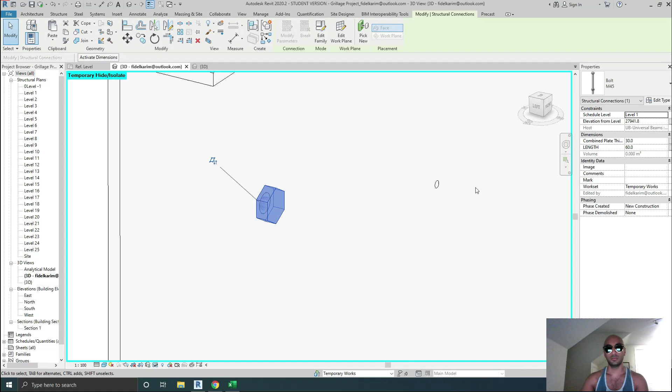Basically, in this video we're going to be making a nut and bolt system.

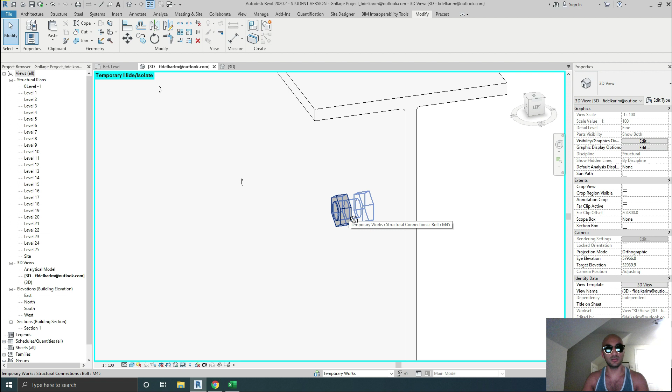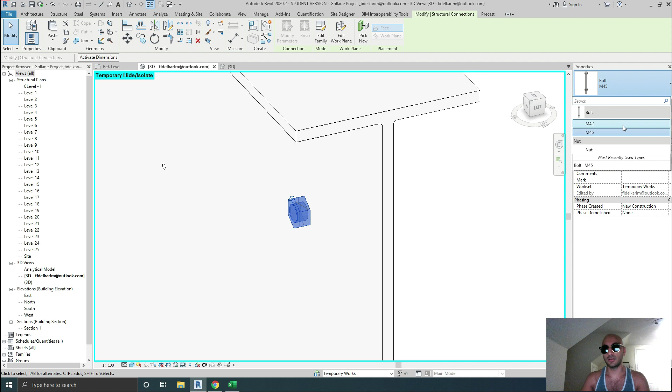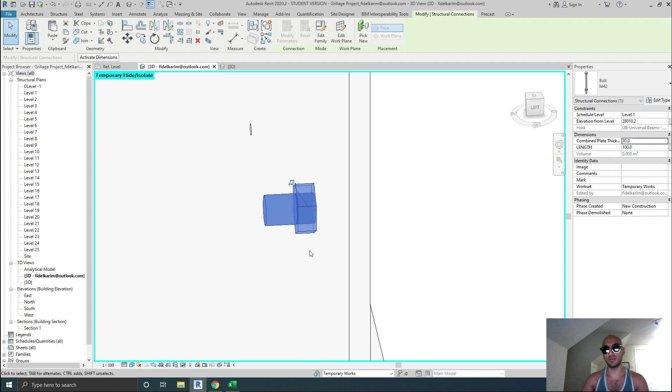So select this bolt, and I can select an M42 size, and it changes to adapt. I can also change the length of this, let's make it 100, that's the full length. Then the plate, I've called this combined plate thickness, because this bolt would be bolting on a plate on this side and a plate on this side. So the thickness would be this thickness plus the plate on this side, and all other plates wherever. Let's say I change it to 40, and we've got a 10mm plate there. You can do that to adapt and it will fit in perfectly snug.

What else can we do with this? We can manually change the diameter here to something else from this list. I've just pre-built in some default, the standard sizes for these particular sizes. These are British sizes, British metric sizes.

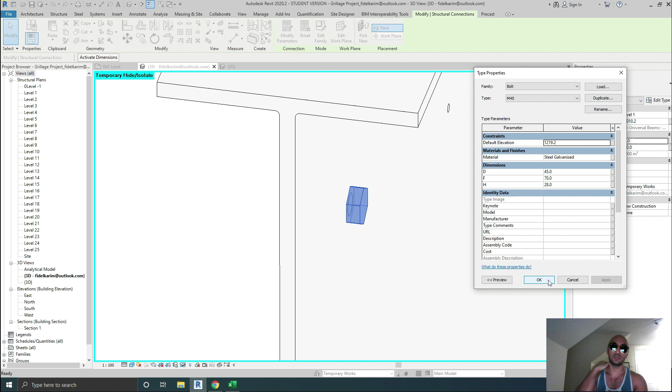By the way, Revit doesn't come preloaded with bolts, so it's very important to know this if you're going to make your own connections. In part 2, we're going to add washers to this, which will be in between the bolt and the face, for those that don't know. And we're also going to make this viewable in fine and coarse modes. Sorry, viewable in fine mode and coarse modes. That'll be in part 2, don't worry about that for now.

So without further ado, let's get started. File, new. Not project, file, new, family. It's got to be metric, generic, face-based. Very important. You can also choose metric generic, but face-based is the best.

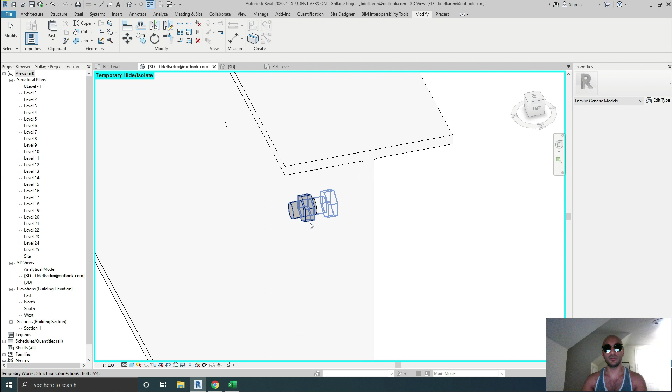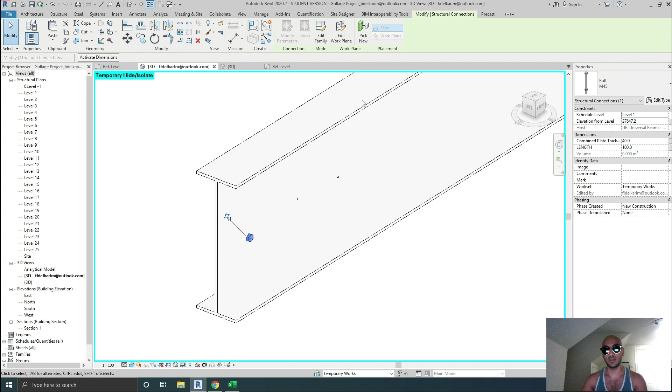Now, the reason for that, this is what you get when you open that. The reason it's face-based is because now that this is on this face, I can move it anywhere along that face, but I can't move it off the geometry. Well, I can move it off, but it's kind of stuck to the geometry of that shape. So although it's moved off, it's still perfectly in line, because it's on that work plane. And if I move this up 500, that moves with it, and that's very important. Always remember that.

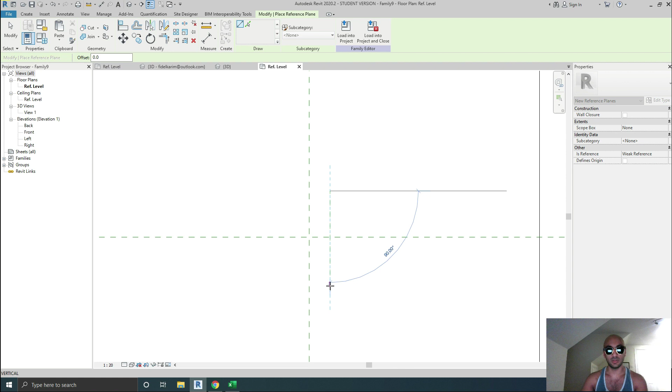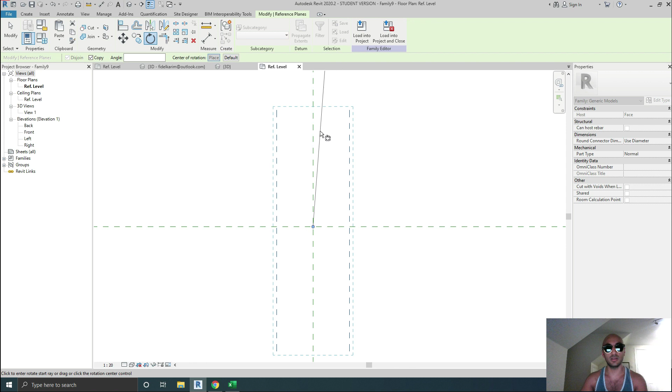Now let's get started on this. Select the reference plane, say CS for create similar. I'm going to create one here. I would like to have them symmetrical, but too bad. Anyway, select it and say DM for mirror. I'm going to select these two, say RO for rotate, copy, say place, I want to move it about this place, there and there. Now select this and say CS.

Create that there, and move it to that intersection. I'll adjust it a little. I should have just copied one. Now select these by holding the control button and selecting them, and say DM for mirror, and there you go. Now you can see a nice little hexagon here.

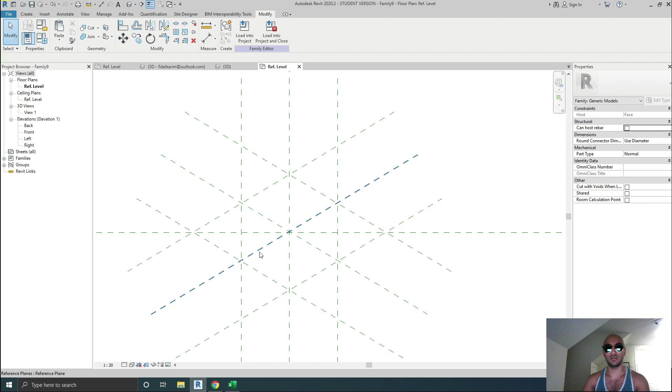First thing I want to do is select these and say not a reference. The reason for that is that I don't want to be able to align to these because they're not really important lines when they're loaded into the model. All will be apparent later, you'll understand later when I load it in. I want to be able to align to this face, that face, or most importantly the center point. I don't want to be able to align to these, they're not important.

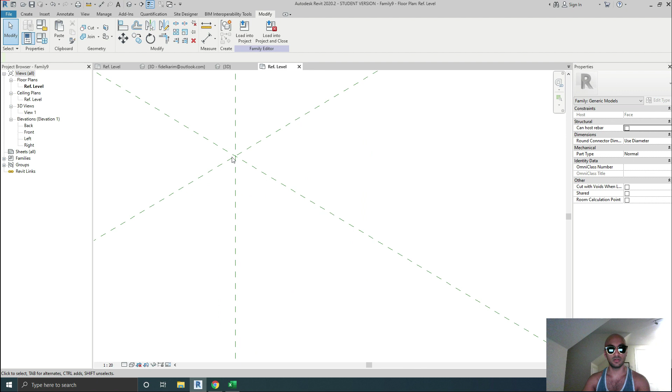Oh, they're not actually. Select them both, say MV. Now they're at the center, it's very important to have them there. Yeah, and these are all good.

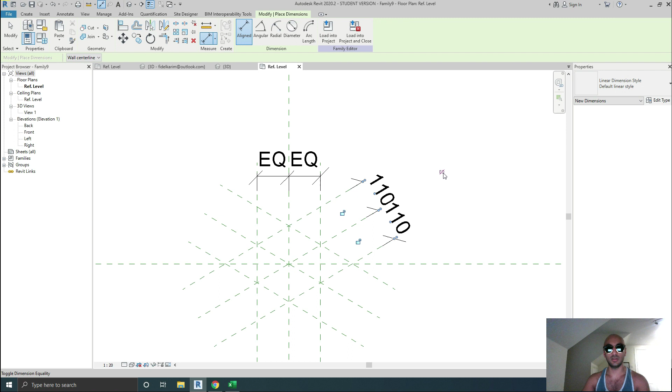Anyway, now let's dimension these. Let me say DI for dimension. This, click, say equal, yeah? This, equal. Oh, before you go on, you should do this before actually - select this one, hold control, select that one, and say pin, so that they don't move. So if I move this, that does not move at all. Yeah, it would have done that anyway, but it's good to lock it in place just in case.

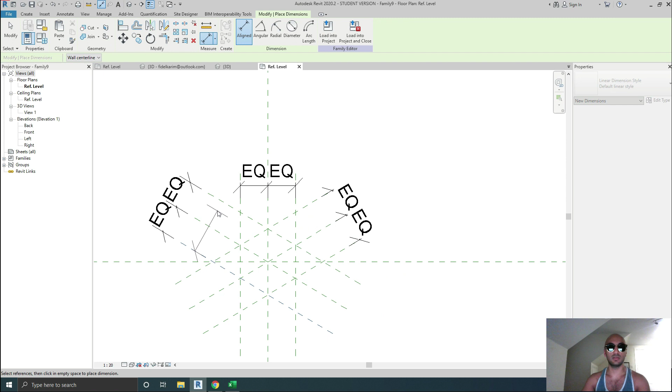Good practice, always remember, good practice is crucial. The moment you do something silly, you're gonna have to find out what you did wrong. That's why we have good practice, we don't want to do silly things.

We want to just do our thing and make sure it's all good. So I'm going to select all of these, holding control, and say new label. I'm going to call this one F, representing the distance across the flats on the bolt head. Yeah, and I want it to be a type parameter.

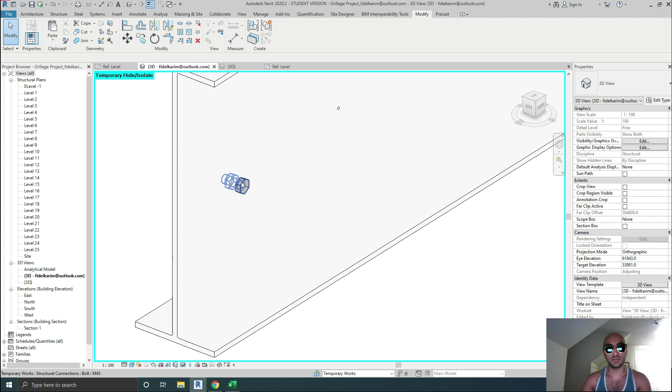So we haven't actually modeled anything yet, but what we have done is we've set up the reference planes for each of these sides. Now in 3D mode,

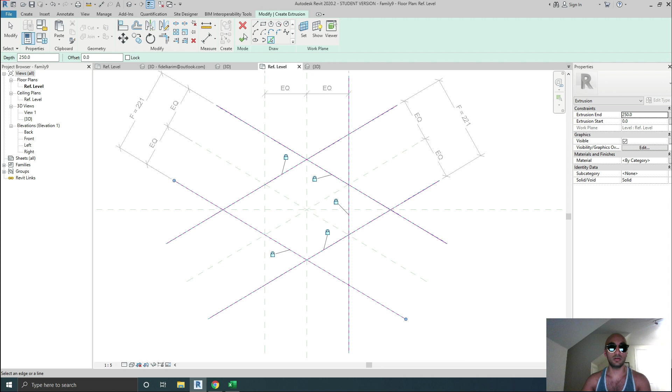I'll keep that. We'll go back to reference plane, reference level, and we will say create extrusion. Select lines, pick lines there, pick this and lock, pick this and lock, pick, lock, pick, lock, pick, lock. Now let's say you forget to lock, or let's say you draw a line manually and you need to lock it to that. You can say AL for align, click this, click that, then lock.

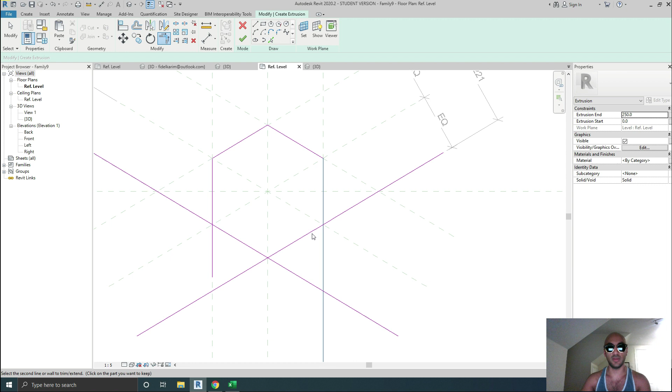Locking is the crucial part. If I align it and then I change something with these dimensions, this will stay in place. Yeah, so always remember to lock. Say TR for trim, there, that, and boom, I think we're done. Yes, we are. Now if I move this up, you'll see they all move together. That is all we want to do. Crucial thing, always put reference planes down and align lines and objects to them.

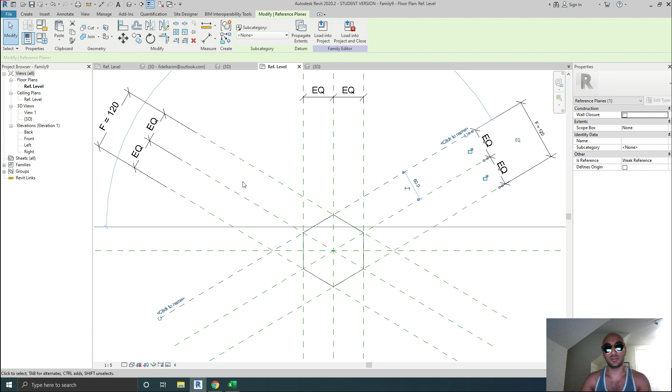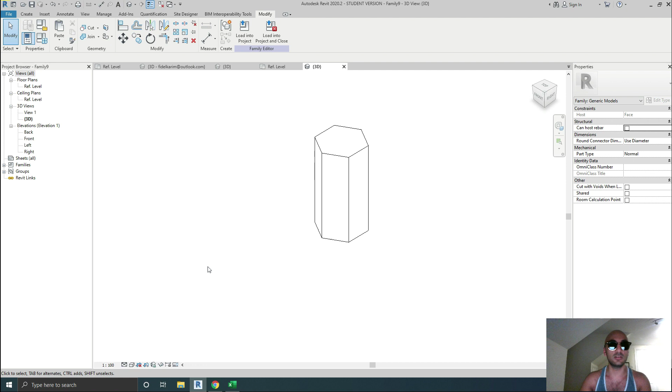Never ever dimension to the face of an object. So never put a constraint or dimension to this extrusion face or that extrusion face. Never ever ever, because they will break. The moment you break one, your whole model's broken, and you need to redimension things and put reference planes in to make it work. We like to make things smart so that we can reuse them. Yeah, we don't create things that break.

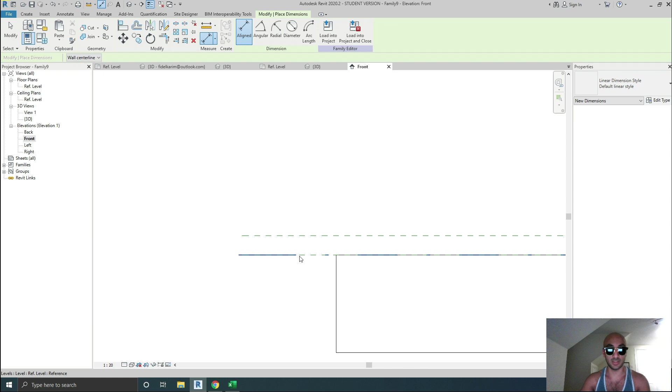Yeah, leave it out. So select a reference plane, say CS for create similar. We're in front view, by the way. Any elevation will do for this. Select, I'll just click and say DI for dimension, and come here to the side, not here, never to the extrusion shape, face, handle, whatever. I think it shouldn't be an issue for this face because it's the default face, but always good practice, reference plane or reference level to reference level plane.

Select that, do that, select it, say new, say call this one H. For the head height, say OK. Now come here, AL for align, click that, lock. And now you'll see the height, you can change it. Sick. Yeah, and that's the head done.

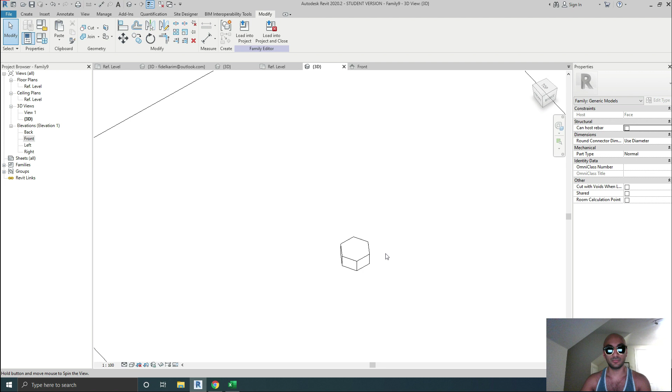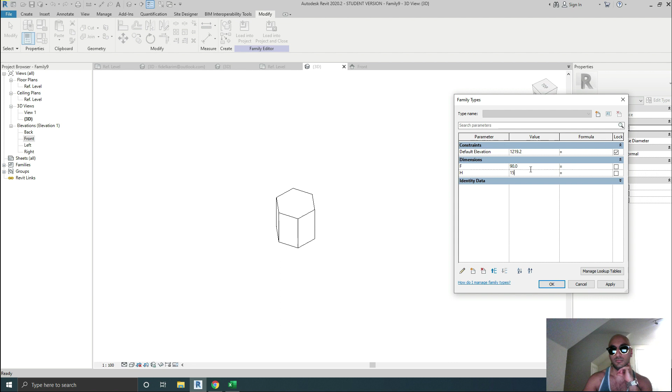Okay. Now we're gonna put the length down. But before we continue, let me show you what you can do with this. Let's say I want the distance across the flats to be 90, and the head height to be 100. It will never be these numbers, but there you go. And it adapts. Nice.

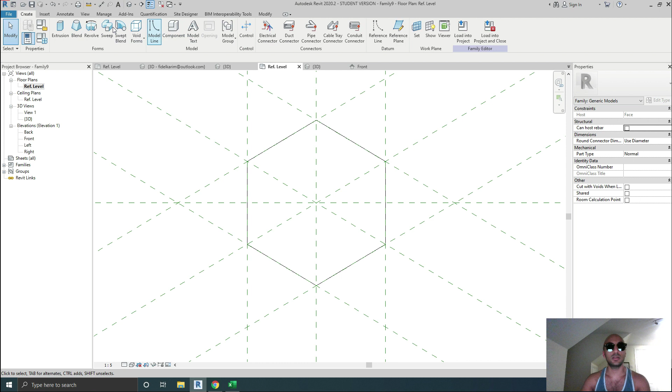Now, floor plans. Yeah, come to the ref level and say create extrusion circle about that center point. And I'm going to drag it off and check this to make the center mark visible. AL for align, that to that, lock, click away, that to that, lock. Yep. And now I'm going to click this, and I'm going to say DI for dimension, diameter, click this.

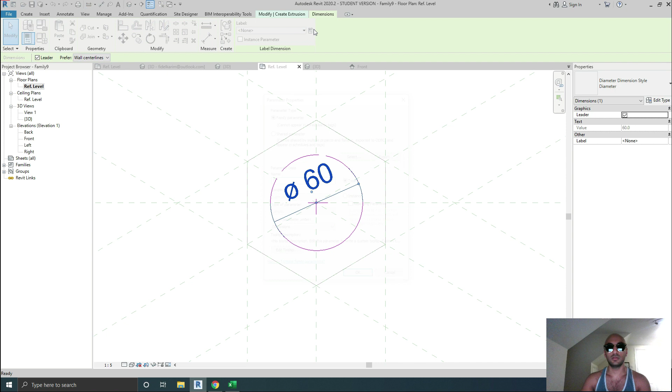This is the only time you can align or label parametric things to lines when there's circles and curves. That's the only time you can do it. It doesn't break when it's curves. So say new, say D for diameter. Okay, great, nice. Great.

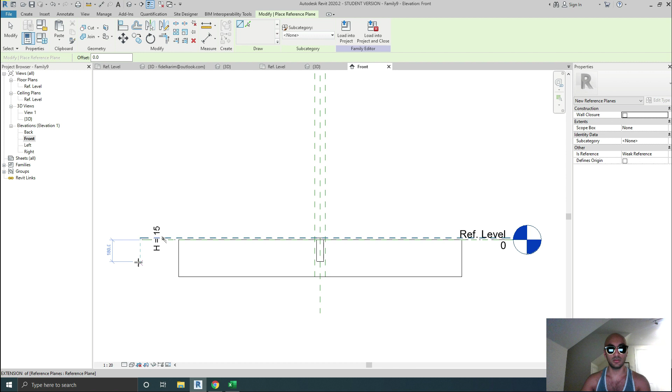Okay, now I'll come to front elevation. You can see it's gone up. I'll drag it down, click the reference plane, CS for create similar. Bring that across. Now DI from level to here. Boom.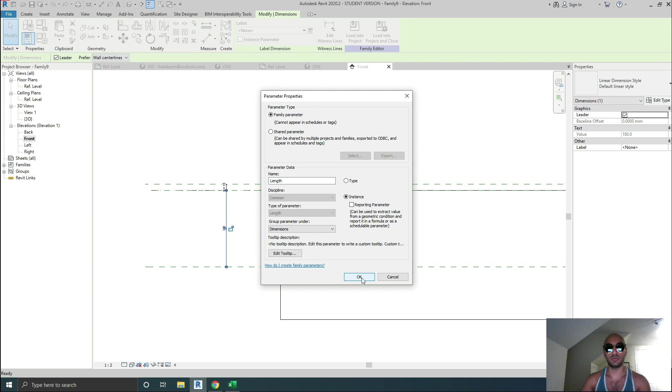I'm gonna give that one, call it length. I'm gonna spell it out for this one. Make it an instance parameter. If you don't know the difference, you will do by the end of this video. I'll load it into the project and explain that.

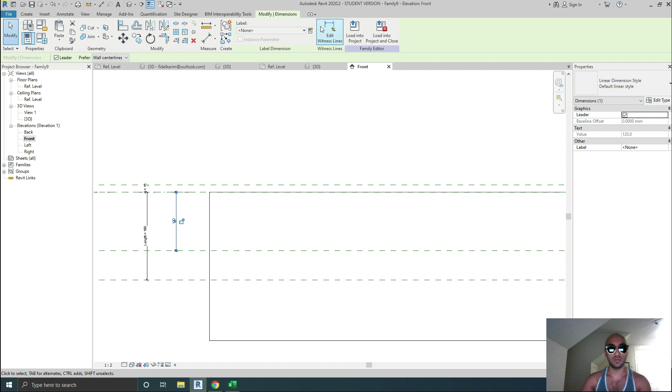And I also want another one of these. Click it and say CS for create similar. Click there, great, nice. DI, label. I will call this one combined plate thickness. Keep that one as an instance parameter also. Okay, now AL for align, here, click, lock, done. Wow, cool, great, fantastic.

Okay, what I'd also like to do, I'm going to click this and say Control C, copy, and then paste aligned to same place. That one's not locked, yeah?

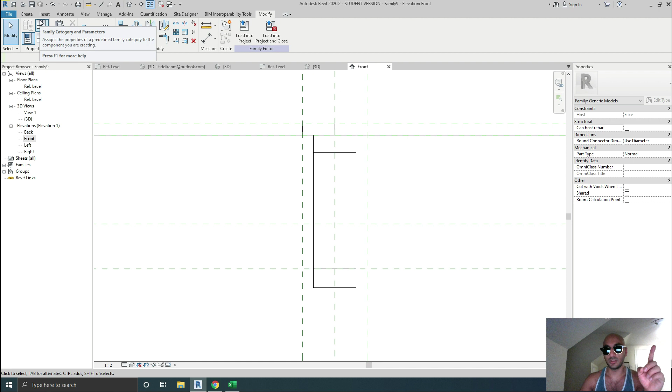Oh, before we continue, one thing we need to do is we need to set this up as a bolt, so Revit knows it's a bolt. So come and click this thing up here, say structural, make it a structural connection, cut with voids when loaded, material for model behavior, steel, and I like to make it a shared parameter value. Say OK, and now when we select this one, and this one, well, not necessarily this one, this one's going to be something else in a minute.

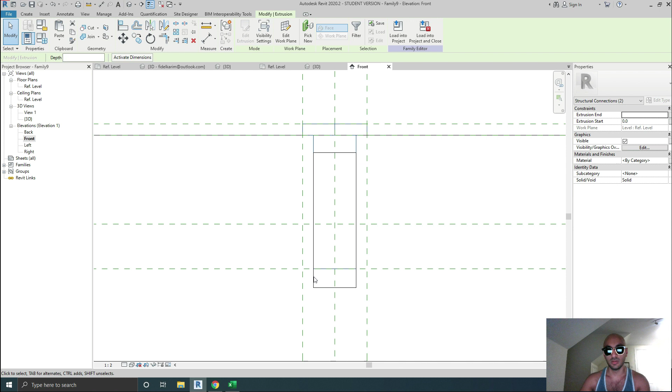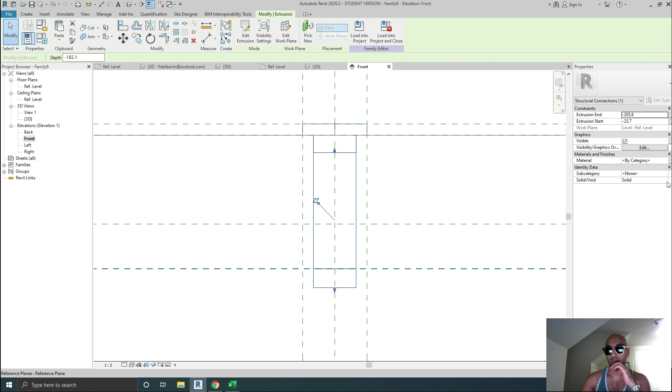Let's hold control, select this and select that, yeah? Material, will come to material in a minute, but subcategory is bolts, yeah? This is going to become a void. This is what's going to cut your beam to leave the hole in there. I'll change the subcategory to void. AL for align.

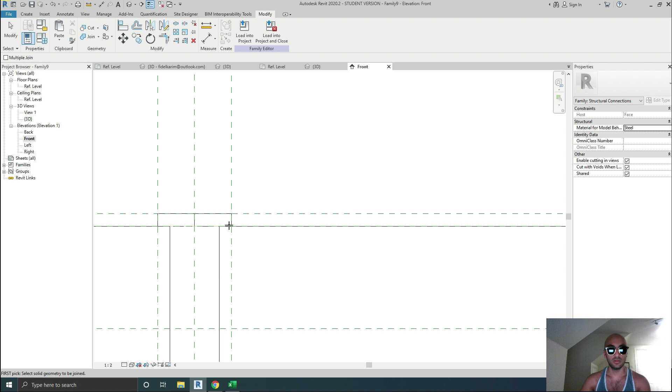Lock that to that. One other thing I'd like to do is join, not the void. It's automatically done it to that one and makes it one element, that kind of thing.

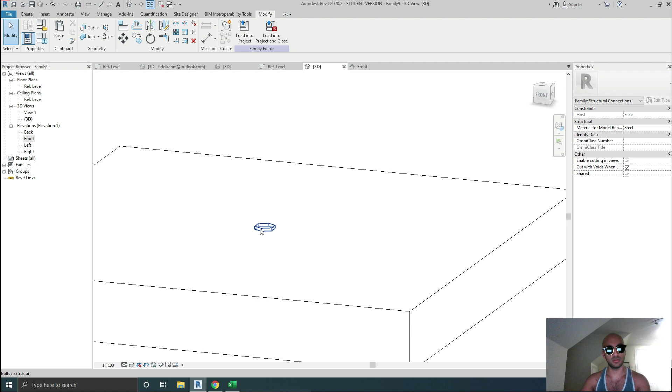I'm going to select all of these and say HI for isolate. Okay, I don't know why that's doing that, but it doesn't matter, you get the point. I'll change it to wireframe, now you can see everything.

Make sure you don't cut this bolt with that void, okay? We're not cutting that, this is to cut something else. Anyway, that's your bolt done.

Now let's look at an example. M45 has a diameter of 45. Firstly, we can do that. Oh yeah, I have set that up, haven't I? And remember, the void already had that parameter in there before we copied it.

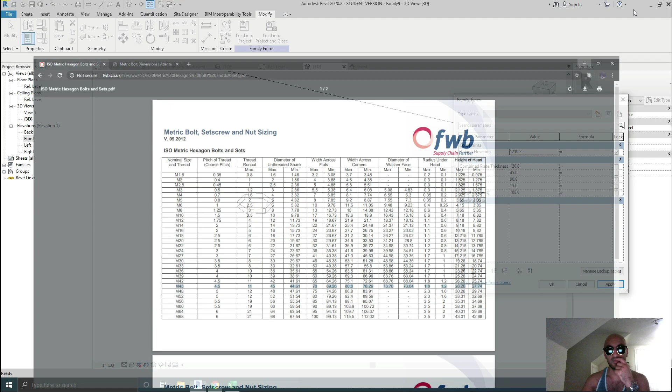Across flats, width across flats, 45. Let me highlight them all. Width across flats, 70. And the height, 28, we'll round it to 28. That's the maximum, maximum was 28.26, and length we'll leave it as it is. Boom, done, there we go.

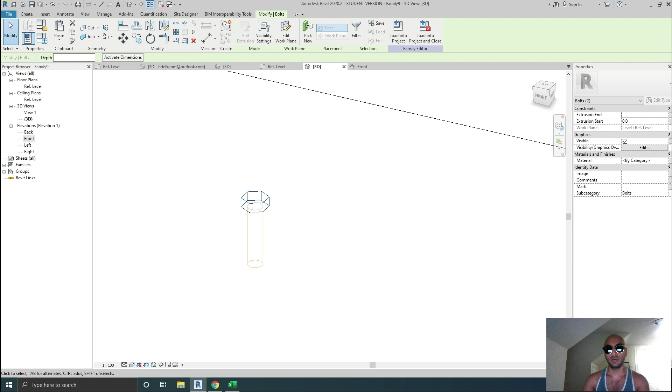Now that one, and I'll press tab and select this one. We need to give them a steel material. Make this realistic, I want to put a parameter on there so that we can change it in the future or something in another project.

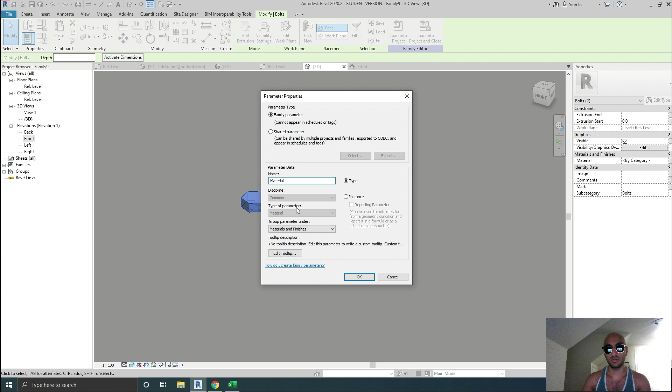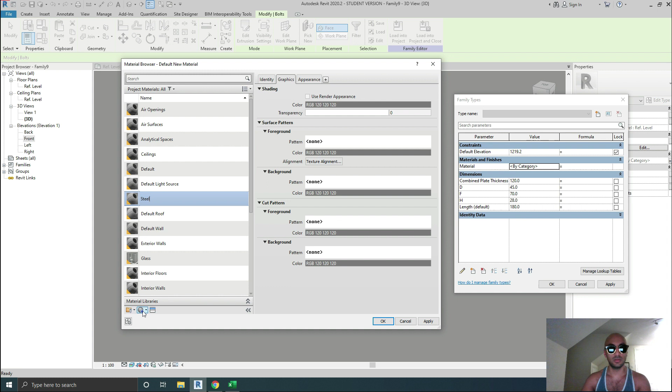Keep it as a type parameter, say material, that's the label. Now I'll come here and I will give that material a material. I don't have anything loaded in that's useful, so I will create a new material. We'll call this one steel. And now go to the library, type steel, just pick a random one. Load that in, so now this material I created will take on those properties.

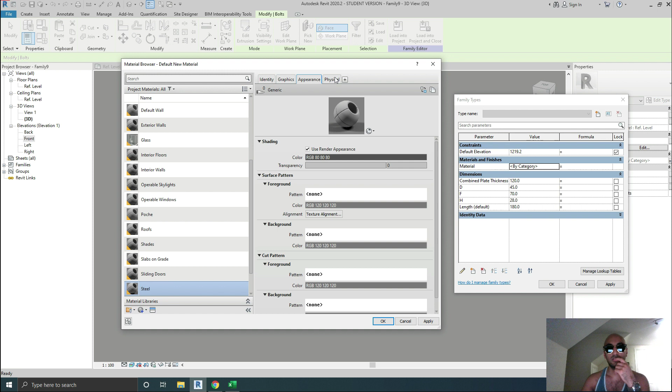And say graphics, use render appearance, not going to give it any cut or surface hatching. Class, we will call that metal. You can fill these out if you like, but there's no real need for this anyway, but just remember those are all there. Yeah, cool, apply. Great, now it's got a material.

Well, I'm going to click this and say hide. How do you do that? Hide element, yeah, there you go. Now you can see the whole thing.

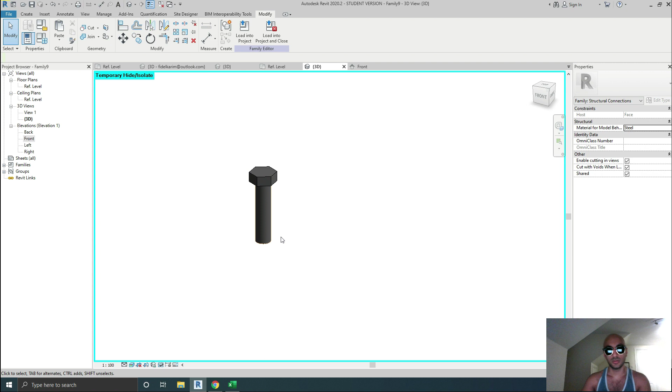So how do you create a nut? I'll save this as a bolt. Oh, there's already one in there. Call it bolt 2.

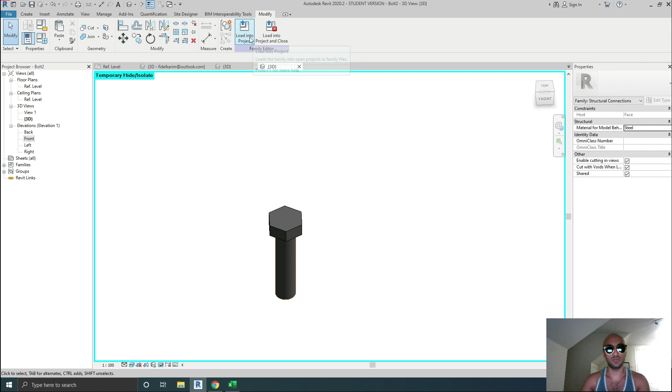Actually, before I continue, no, I will continue. I'm going to load this into, let me close down all windows except, yeah, load into project. I'll load it into the grillage project, just so you can see. There you go.

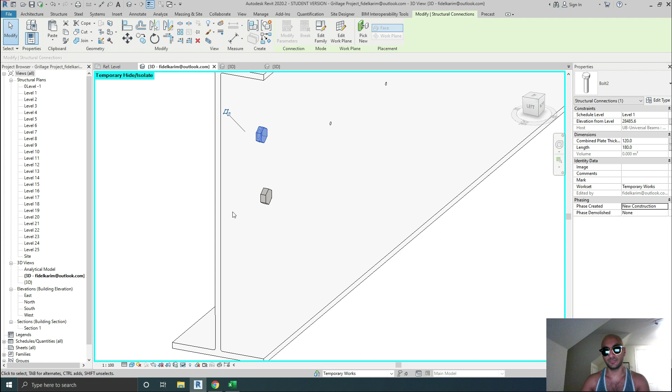So the reason it's a different color is because it's a different material, I believe. Yeah, so that one is steel galvanized, and this one is just steel. It doesn't really matter, to be honest.

Anyway, we need to get the nut on now. So what I'm going to do is I'm not going to create something new, it's very similar to the starting point, but I'm going to save as. File, save as, family, nut 2, save.

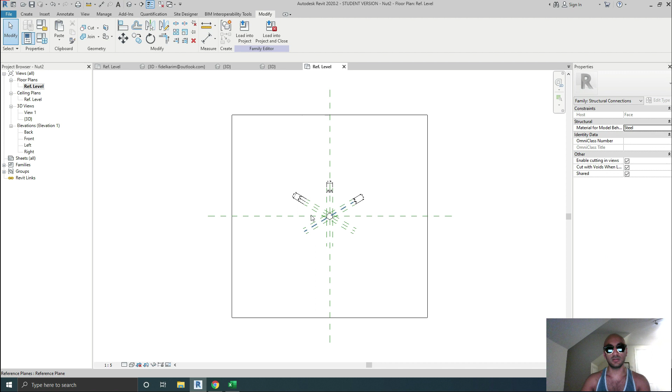What I'm going to do is delete the void and delete that thing. Make sure you don't delete this thing, yeah? Now come to floor plans, and all of these are already set up exactly the way I want them to be, yeah?

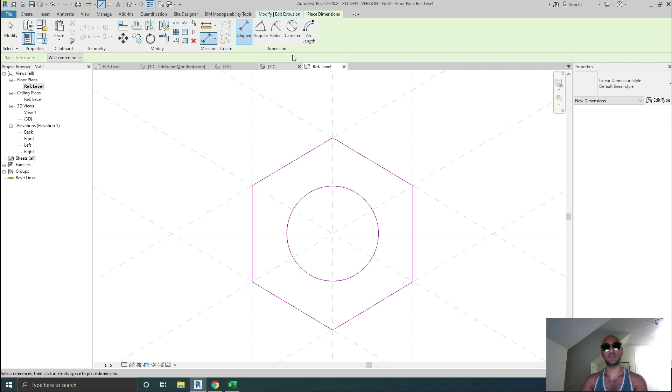But what I need now is to edit this extrusion. Double click it, say circle, create that, DI for dimension, diameter, click there, select it, say D for diameter. Boom.

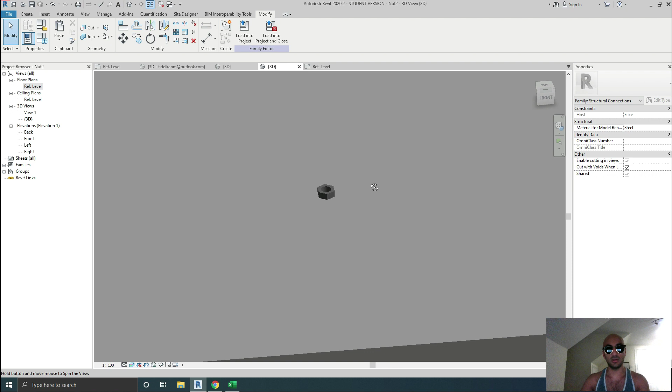So HR for reset, there you go. Reset the temporary hide isolate. And now if I come here, I don't need this anymore for the nut, yeah?

It's still going to be in the bolt, so I'll delete that. And I don't need the length parameter anymore, we're just cleaning up now. We need the diameter, we need the thing across the flats, and we need its height.

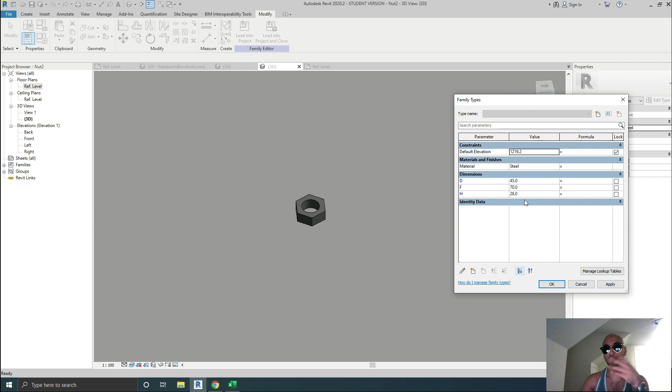Okay, so I'll load into project and close, I'll load it into bolt. Okay, I'll cancel that. Where is... Oh, okay, so I need to reopen. I'm going to close this one down, that was what I was making earlier.

I need to reopen that bolt 2, there we go. So now I need to load this nut into the bolt, so load into project and close because I won't need it. And yes, I'll save changes. And I'm not going to place it anywhere.

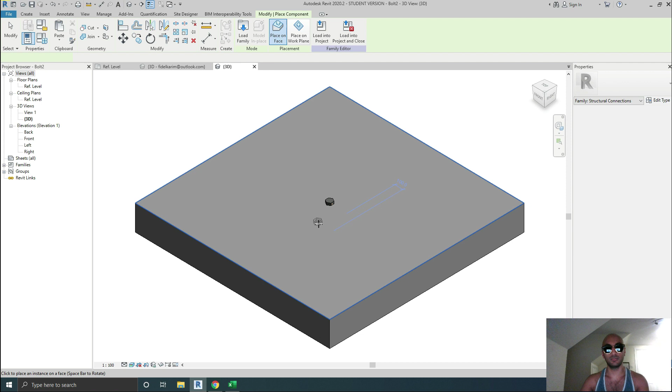But where it's going to go is on this reference plane. Actually, I should have placed it somewhere. If I expand this down now, structural connections, nut 2.

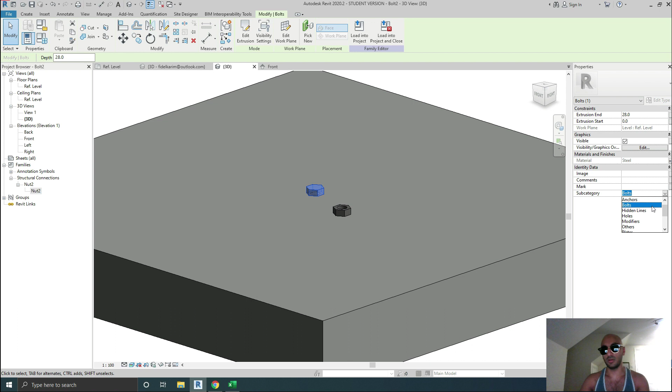The nut is modeled as a bolt as well because there's no option for bolt nuts in the subcategory, but it's part of a bolt anyway. So what I'm going to do is come to front, select the nut, say edit work plane, pick a plane, pick that one, and then flip it.

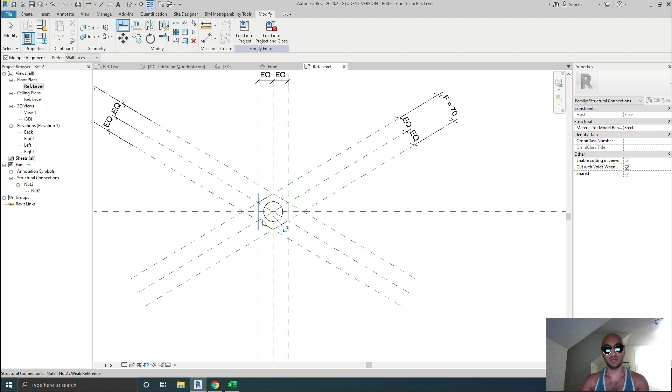Floor plans. AL for align, that to that, lock. That to that, lock. Come to front, and there we go.

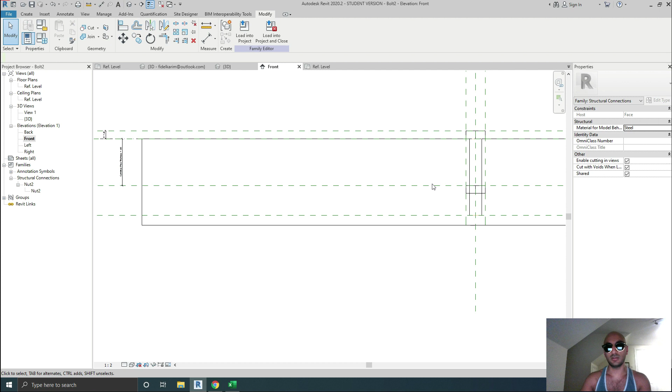So when I expand this down, great. You know, I'm actually gonna change the length because it's unnecessary. What I want to do is have a spacing here, DI for dimension here to here.

I want it to be automatic because it's just unnecessary. I'm gonna name it length. I'm gonna use the length parameter, but I'm gonna rename that one. Rename: length beyond nut.

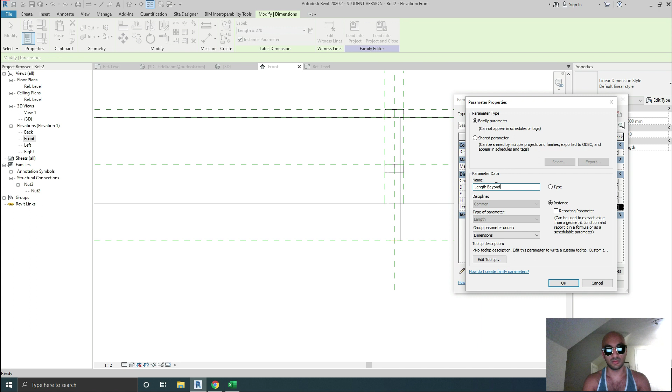Yeah, and I'm just gonna drop it down to like 30. Well, 40. Oh, it's an instance parameter. I want it to be, yeah, it's an instance parameter.

Yeah, because the length, the combined, I'm going to move this down as well. That one's an instance one, right? Yeah. Cool. Okay. Great. There we go.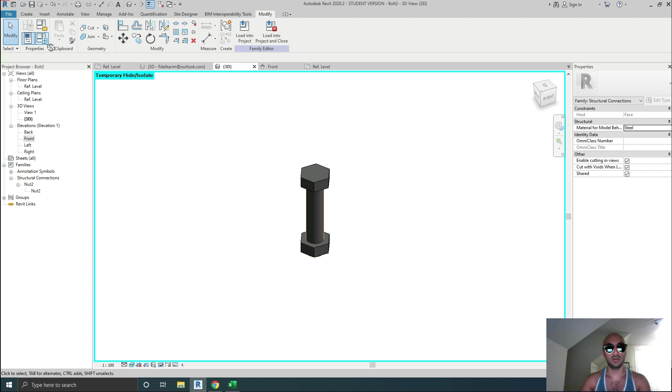Hide this. So now I want to create those presets. Come here, click that, say new. It's going to take these default values and apply it to whatever I make.

So this was made as an M45. Great. Now if I want to make a new one, I'll say new type M42, and then I come here, find out the M42 values.

So what is it? F is 65, D is, well, no, that's not it. D is 42, obviously it's 42, and 26 for the H. H is 26, D is 42 as the name suggests, and this would be 65.

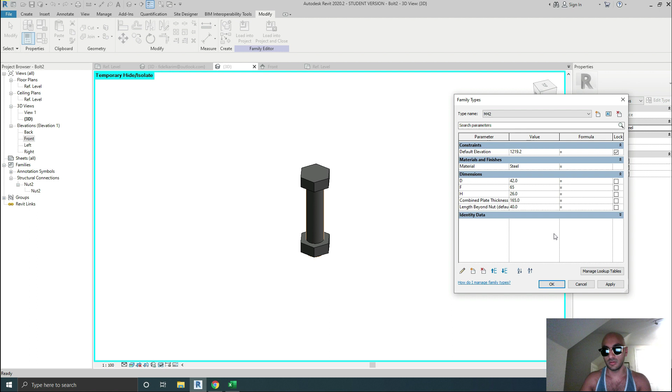Apply. Now the crucial thing is that the nut has not changed, so select the nut, come here to edit type. Ooh, okay. We need to open that nut back up. We need to change all of these to instance parameters so that they can be edited.

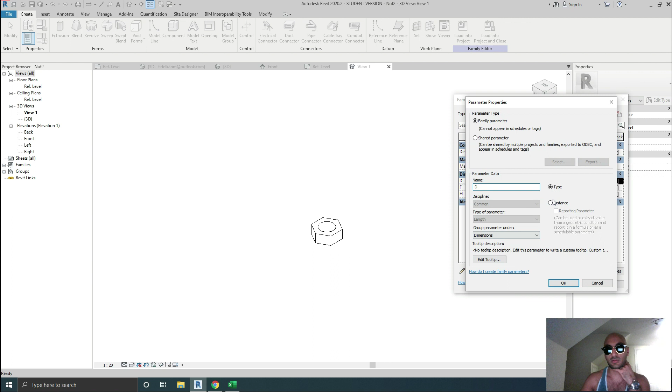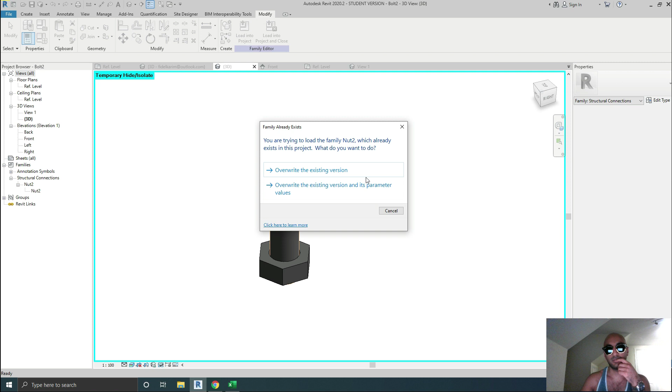Load into project and close, bolt 2. Yes, I do want to save changes. Yes, I do want to replace, yeah. Overwrite existing version. Now, let me say CO for copy and copy one there, because I want you to understand

how instance parameters work. If I change this to 42, that changes and that doesn't, yeah? That's what an instance is, because the parameter is for this instance only, not for this type of bolt. The type parameter is for everything, for all types, yeah?

So they both have their uses. Just remember that. I'm going to delete that one out. And anyway, I'm going to select this one and say I want D to be its parameter, because this project has its own D, F, and H. This one has its own, and this one, this family we have open has its own.

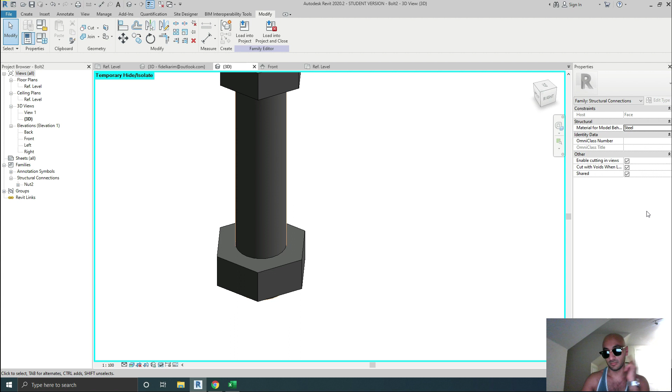Now we need to tell Revit that we want them to be the same. So F becomes F, H becomes H. I don't really get what this default elevation is. It's not really necessary, but whatever, it's there.

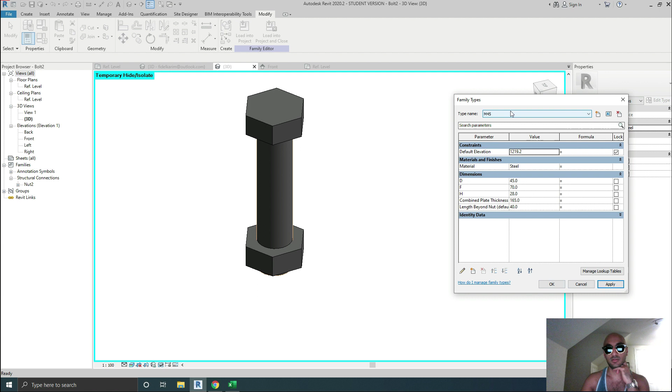Now everything we've already put in will apply to these, yeah? So if I forgot to do it before, it still applies, because these have all been, it's basically taking the data. Now I'm trying to find a way to

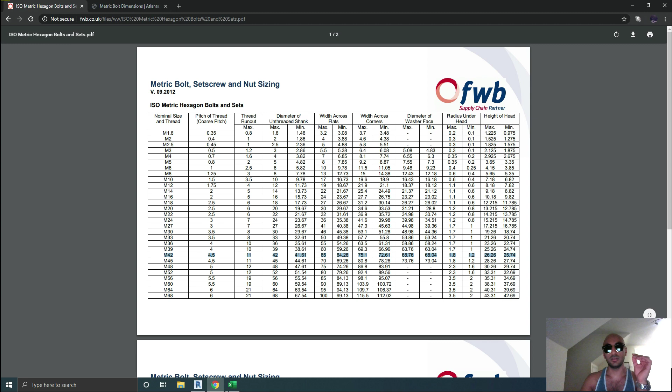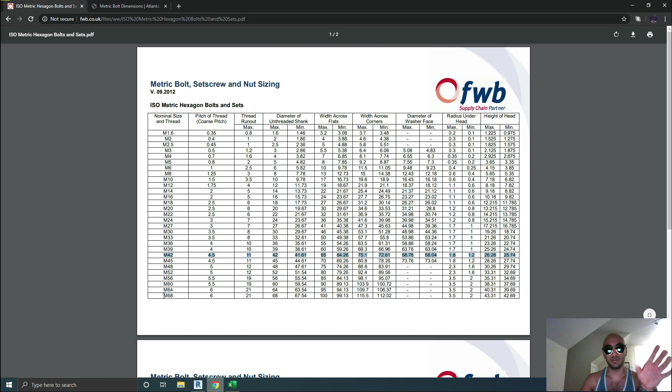take all of these, put them into Excel, separate out the ones that we need, plug it into Dynamo, and tell Dynamo to create all of these types with the numbers we give it within a minute or however long it takes. That may be in a future video.

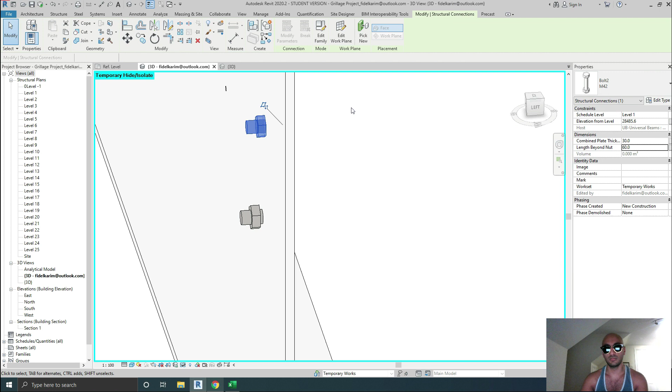can pick the type. There's one called bolt 2 for some reason. Let me check that. Oops. Yeah, I don't know what that is, but point is, the rest work.

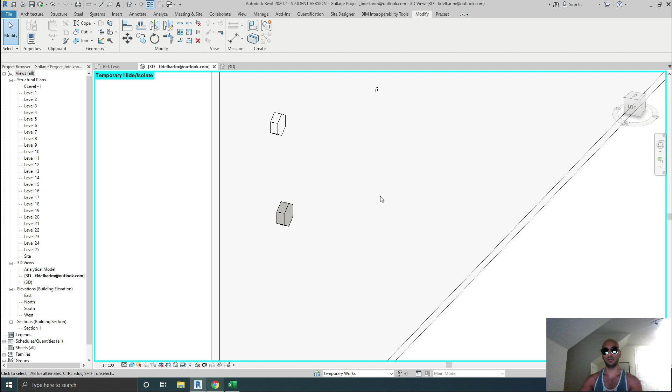education should be free. Oh, sorry, before I go, I'm gonna cut the beam with this, because we have a void in there. Now if I isolate this beam, you can see already there's a little thing there.

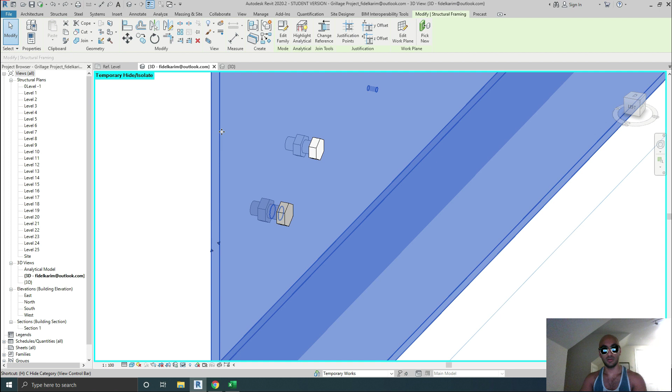I'll say HI for isolate element. There you go. Undo, undo. HI before, there was no cut. HR to reset. Ooh, whole model's in there.

Okay, and I forgot to move it back down, so whoops, properties. So if I change that to 0, they all move with it. Brilliant.